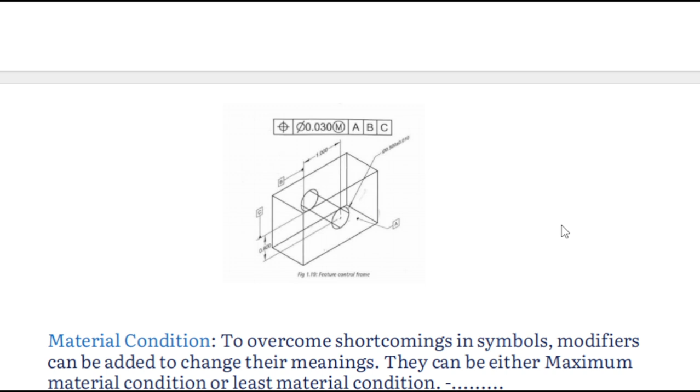हेलो एवरीवन। आज हम देखेंगे जीडीएनटी का सेशन थ्री में जीडीएनटी रूल्स एंड कंसेप्ट्स। जीडीएनटी रूल्स एंड कंसेप्ट समझने के लिए सबसे पहले हमें फीचर कंट्रोल फ्रेम अंडरस्टैंड करना होगा।

फीचर कंट्रोल फ्रेम एक फ्रेम होता है जिसमें हम टॉलरेंसेस, डेटम्स एंड टॉलरेंसेस के सिंबल्स एंड मटेरियल कंडीशन शो करते हैं। In feature control frame has the following concepts: a geometric characteristic symbol, second is tolerances zone descriptor, third is tolerances of location, fourth is material condition symbol, fifth is primary, secondary and tertiary datum.

हम स्क्रीन पे देख सकते हैं कि फर्स्ट हमने एक ज्योमेट्रिक कैरेक्टरिस्टिक सिंबल्स को ऐड किया है। सेकेंड, हमने डायमेंशनल टॉलरेंसेस ऐड की है। थर्ड चीज इज हमने मटेरियल कंडीशन ऐड की है। एंड दिस इज ABC इज द प्राइमरी, सेकेंडरी एंड टर्शरी डेटम्स।

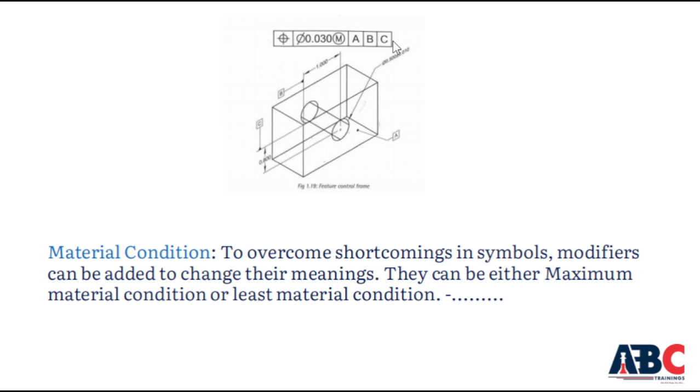अब हम देखते हैं कि मटेरियल कंडीशन होता क्या है। मटेरियल कंडीशंस मीन्स to overcome shortcomings in symbols, modifiers can be added to change their meaning. They can be either maximum material condition or least material condition.

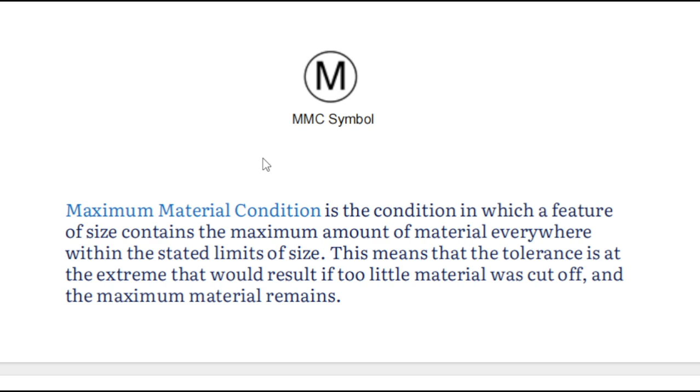Maximum material condition. What is the maximum material condition? Maximum material condition means the condition in which a feature of size contains the maximum amount of material everywhere within the stated limits of size. This means that the tolerances is at the extreme that would result if too little material was cut off and the maximum material remains. Maximum material condition symbol shows by the M.

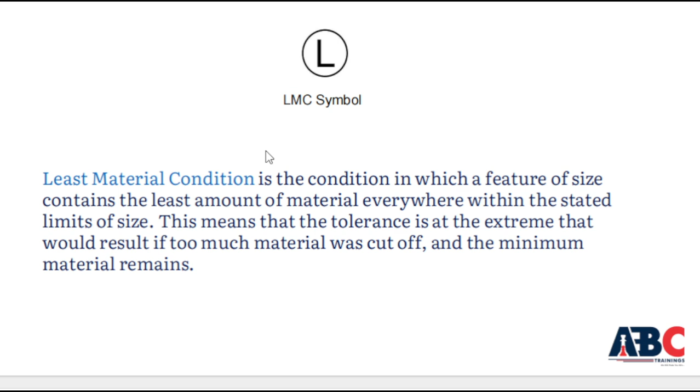And what is the least material condition? Least material condition is the condition in which feature of size contains the least amount of material everywhere within the stated limit of size. This means that the tolerances is at the extreme that would result if too much material was cut off and the minimum material remains. Least material condition symbol shows by L.

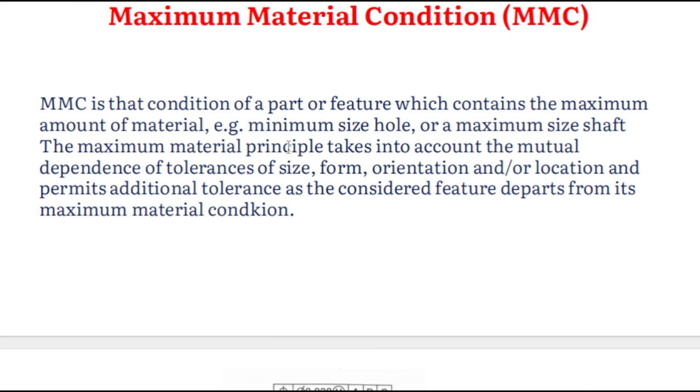नेक्स्ट टॉपिक हम देखते हैं कि कंसेप्ट्स में वर्चुअल कंडीशंस। व्हाट इज द वर्चुअल कंडीशंस?

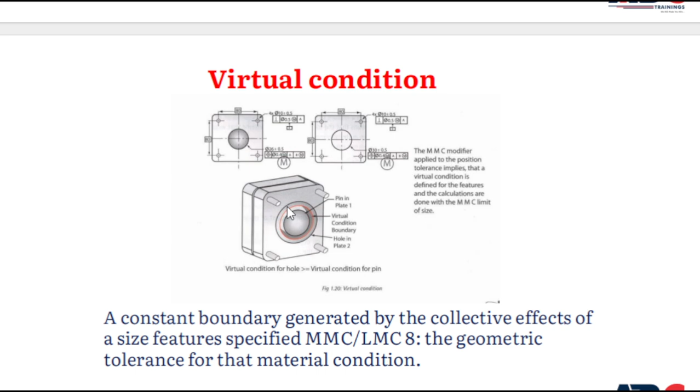Virtual conditions shown in the screen, which is shown in the image, is represented by red symbol, red circle. This circle shows the virtual conditions.

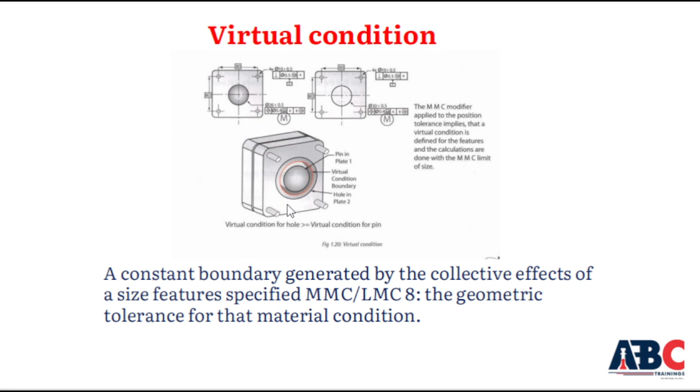What is virtual condition? Virtual condition is a constant boundary generated by the collective effects of size, feature specified MMC or LMC, and the geometric tolerances for the material condition.

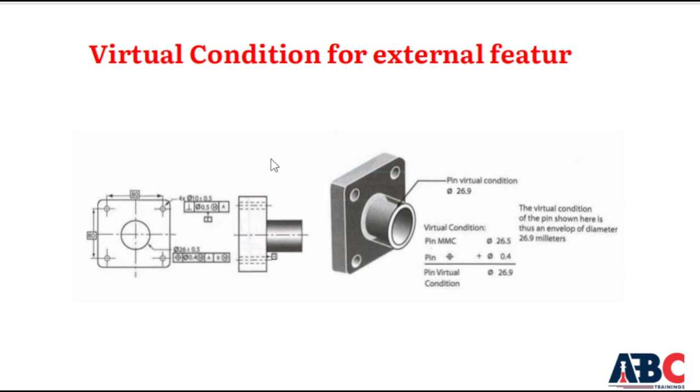Virtual condition for external feature. Virtual condition of external feature is calculated as pin maximum material condition plus pin position tolerance. They both are calculated as adding condition, which shows the pin virtual condition. In this figure, the external feature virtual condition for external feature is diameter 26.9.

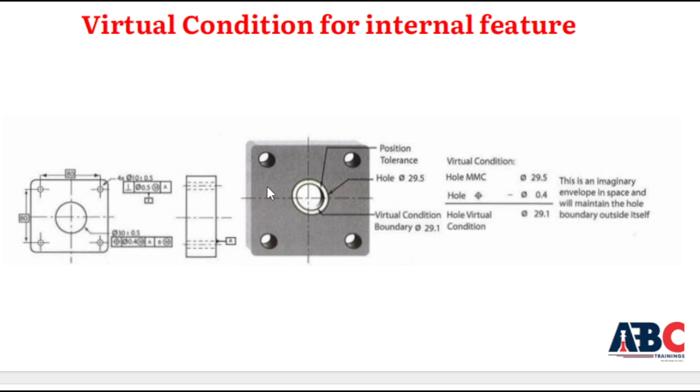This is virtual condition for internal feature. For internal feature, the virtual condition is calculated as maximum material condition of hole minus hole position tolerance. The virtual condition for internal feature in this sketch shows the diameter 29.1. This is an imaginary envelope in space that will maintain the hole boundary outside itself.

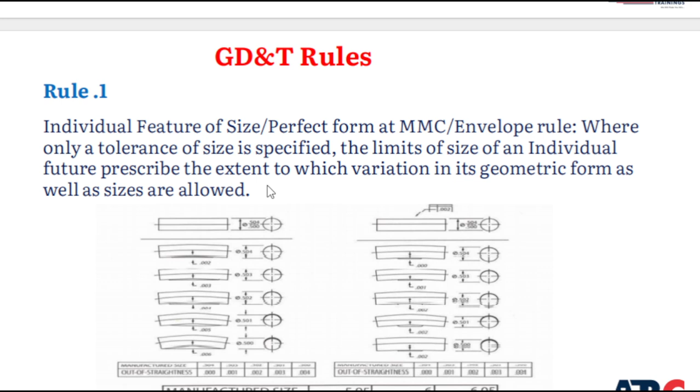GD&T, geometric dimensioning and tolerancing, creates the rules. These are two rules. First rule is individual feature of size, perfect form at maximum material condition or envelope rule, where only a tolerances of size is specified. The limit of size of an individual feature prescribes the extent to which variation in its geometric form as well as size are allowed.